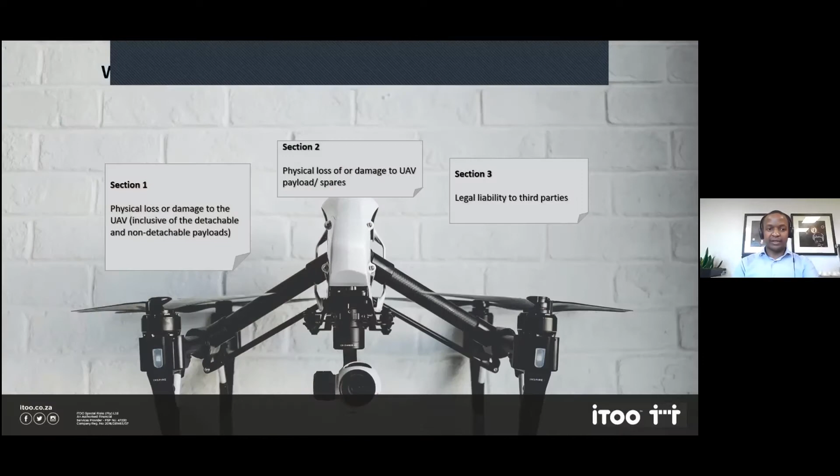Okay, let's see if these slides work. So a brief overview on what the iTOO UAV policy covers: there are 3 sections to that policy.

The first section mainly covers any physical loss or damage that happens to the UAV, or basically the drone, and anything that is a payload to it, whether detachable or non-detachable. So anything that is a payload—it could be cameras, anything you can attach to the drone and use in harmony with it. An example would be scanners, cameras. Human beings—no, you can't attach them to a drone.

Section 2 then covers spares for these UAVs. Spares are anything needed for the drone to operate, but is a spare part waiting on the side while the drone is using other parts. For example, your batteries, your rotors—section 2 covers that as a spare, which is ground cover against any loss, theft, or damage to it.

Then section 3 is legal liability to third parties. In this section, the liability we cover is for any damage that happens to property or physical bodily injury.

Goes also on to noise and privacy coverage. So that is just the brief of these three covers, or these three sections, which are the main sections to the policy. Then there's also extensions to the policy.

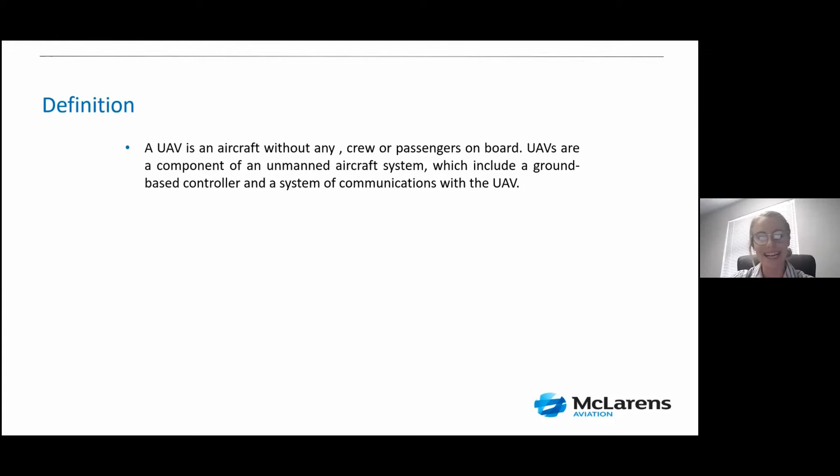Okay, let's go on to the next slide. All right, so over here we're just going to look at a quick definition of basically what a UAV is. So from this we'll obviously see a UAV is an aircraft without any crew or passengers on board the aircraft, as they would call it. And then it just says UAVs are a component of unmanned aircraft systems, which include a ground-based controller and a system of communications with the UAV.

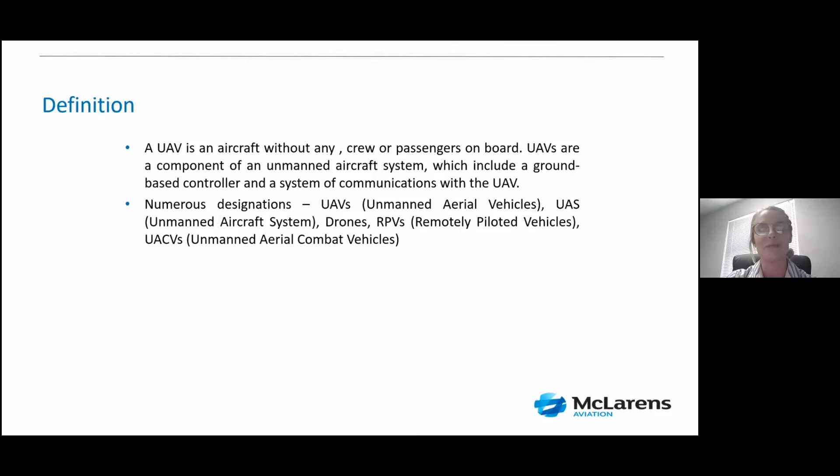There's numerous designations and names such as UAVs, which we said is unmanned aerial vehicles, UAS unmanned aircraft systems, we've got drones, we've got RPVs, remotely piloted vehicles. So there's many different words, and it's all the same. However, it just depends from person to person what they would prefer to call it, but the most widely used one would be a UAV. So for the sake of the presentation, we are just going to stick with UAV.

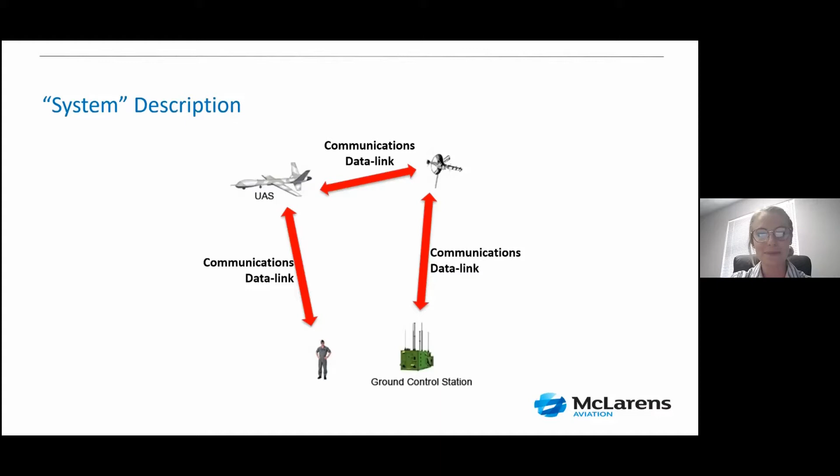Right, so now let's have a look at the system description. So over here we've just got a little bit of a diagram to show how everything interacts with each other. The ground control station, via links, communicates to satellites, to the UAV, and then back to the operator and vice versa. Right, so good, next one.

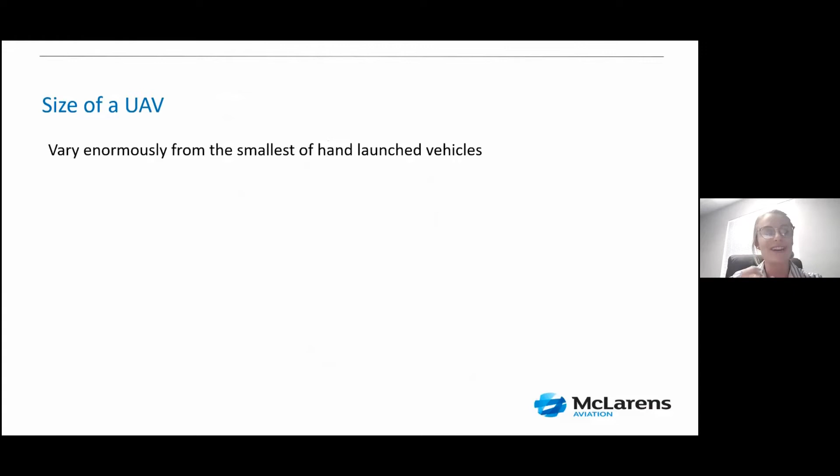Okay, all right, let's go on to the next slide. Okay, so let's have a look at just some manufacturers we've got here. We've got DJI, SenseFly, ALTI UAS, Parrot, Draganfly, 3D Robotics, Micro Multicopter, Aerialtronics, Precision Hawk, and many more companies that are less well known. However, they are a big list of commercial drones. DJI would be the biggest manufacturer that we've dealt with, as well as SenseFly.

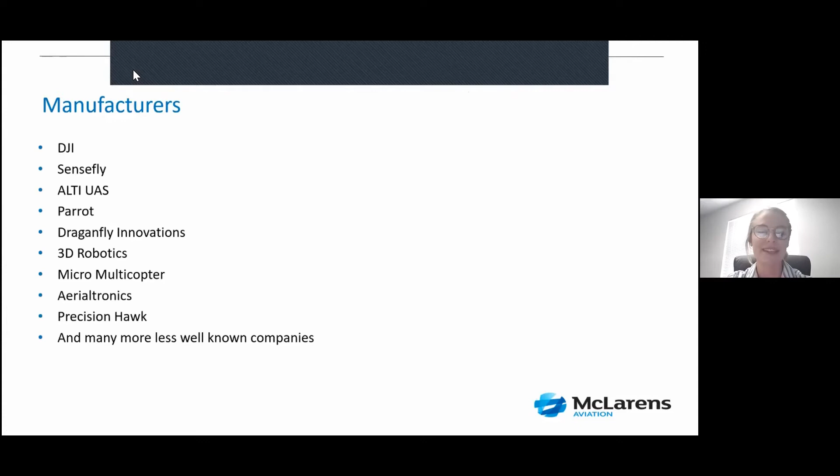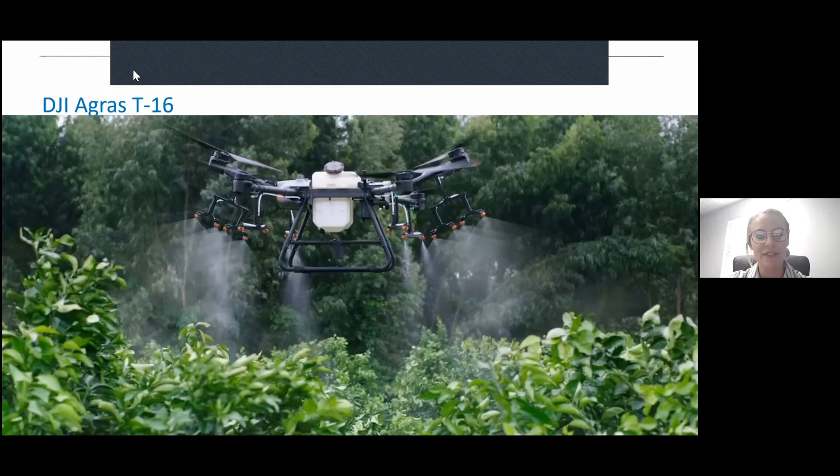And then we've got the DJI Agras T16, which is a crop spraying drone. Again, varies in size, looks, everything like that. So there's just a few different examples of the drones that you would get, as well as the ALTI Transition drone, which is the fixed wing VTOL drone. And again, we can see how big that drone is.

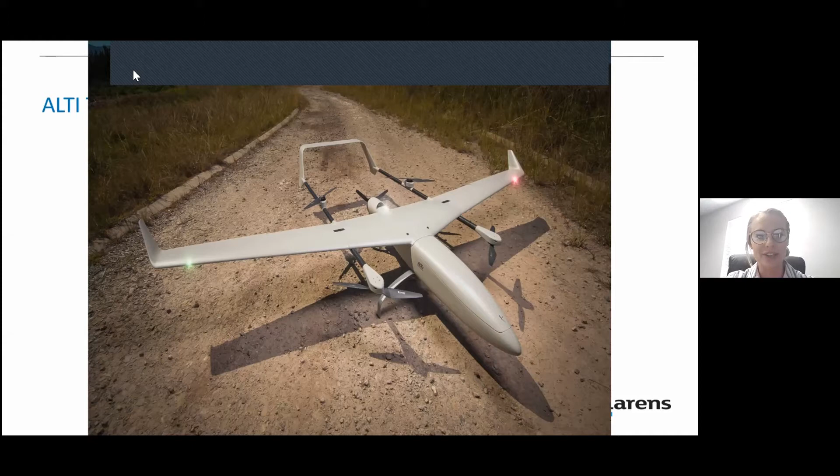Okay, so over here, we've just got a quick video of the different types of UAVs, which I will just ask Seku to play, and then we'll just have a look at that.

Drone types. The drone industry has really taken off over the past decade. From racing drones and hobbyist options to delivery drones and more commercial uses, many of us are finding reasons to love these mainstream convenience boosters. To learn more, let's dive into the video.

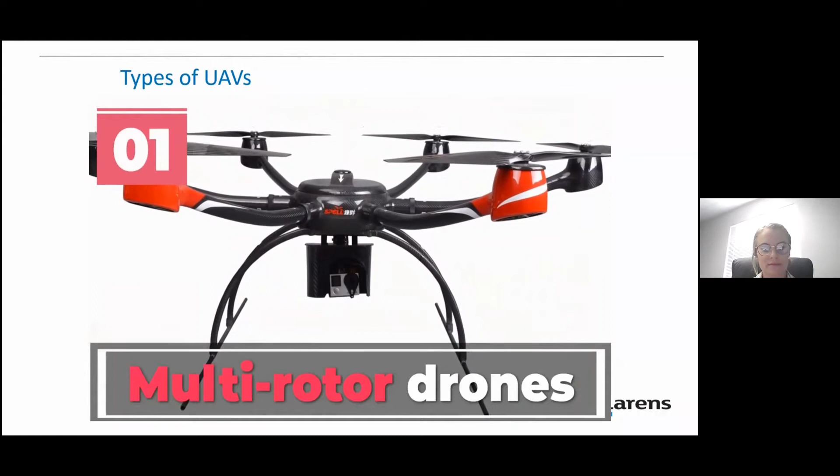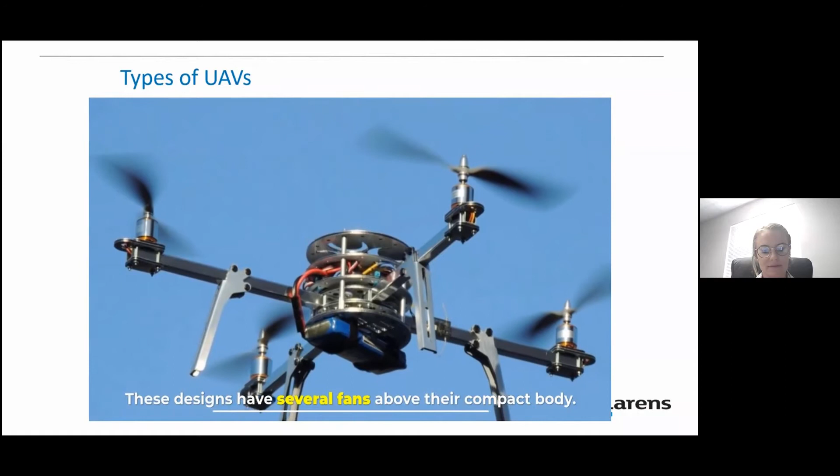Number 1. Multi-rotor drones. If you've seen small drones in your local park, they're likely multi-rotor models. These designs have several fans above their compact body. The multiple propellers create powerful lift and give the pilot precise control.

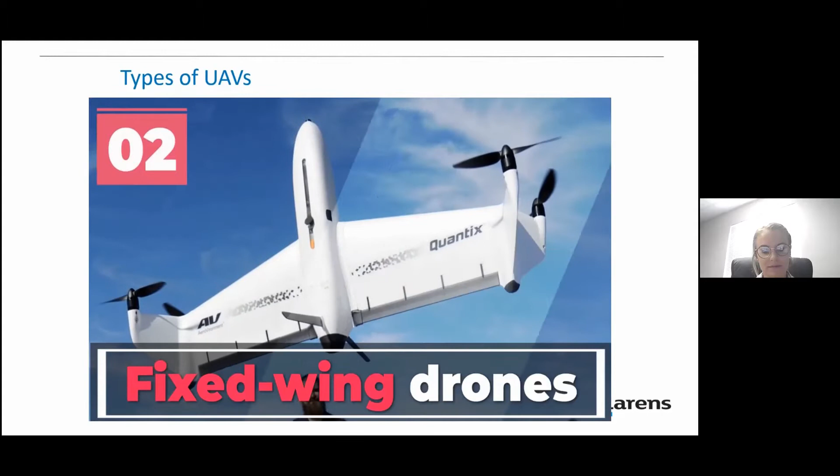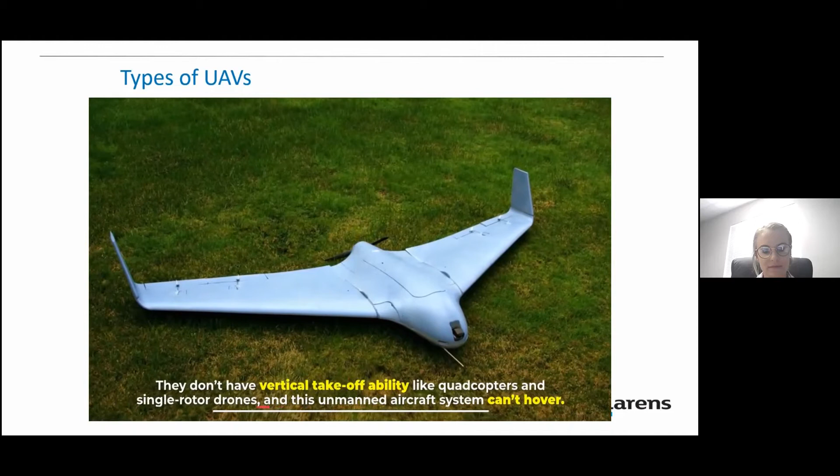Number 2. Fixed-wing drones. As their name suggests, fixed-wing drones look more like conventional planes, requiring a runway or a catapult to launch. They don't have vertical takeoff ability like quadcopters and single-rotor drones, and this unmanned aircraft system can't hover.

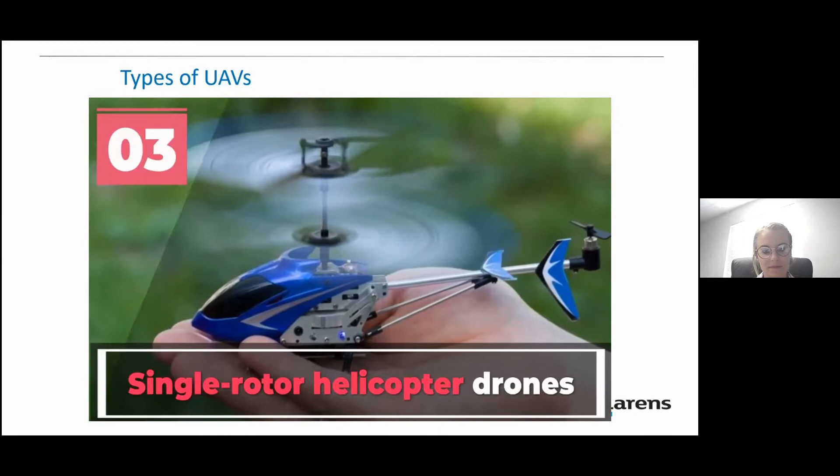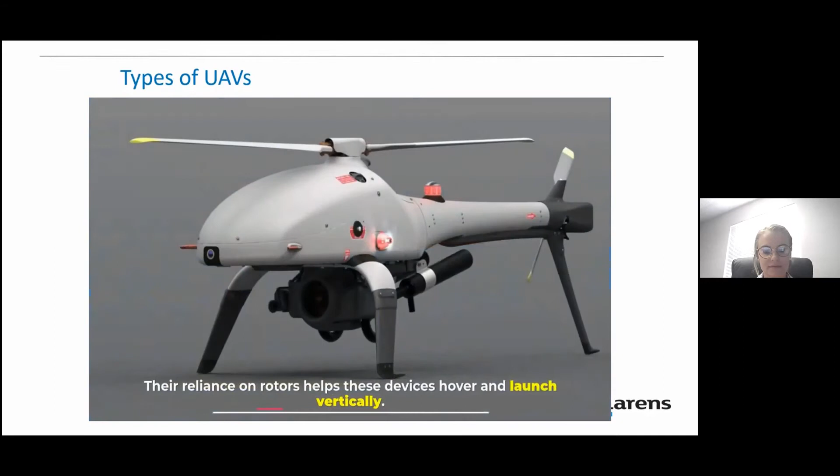Number 3. Single-rotor helicopter drones. These helicopter-style drones combine the best attributes of tiny multi-rotor devices and large fixed-wing units. Their reliance on rotors helps these devices hover and launch vertically. They tend to be larger than their tiny counterparts, suiting them to carry larger payloads. The lack of multiple motors makes them more efficient than multi-rotor models.

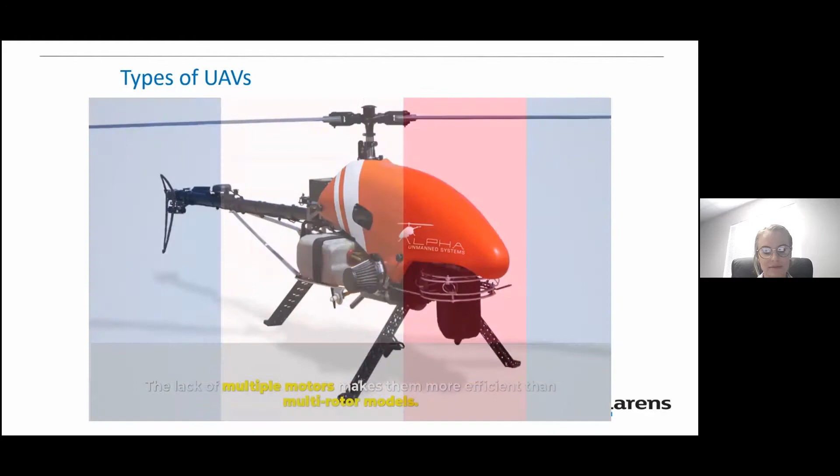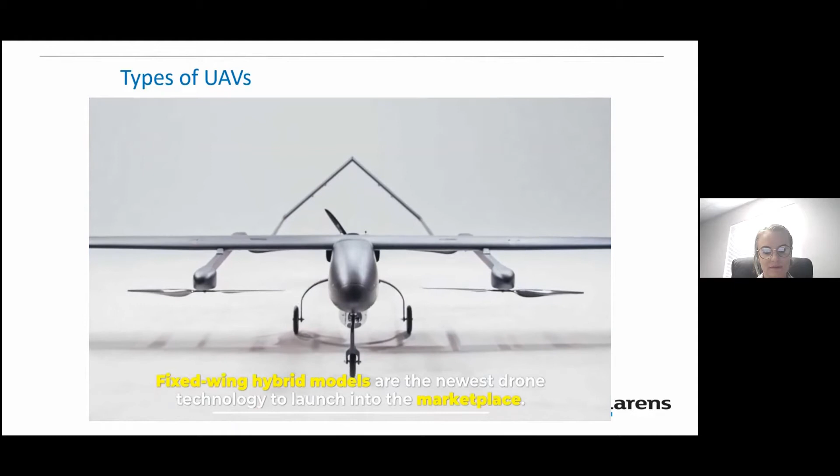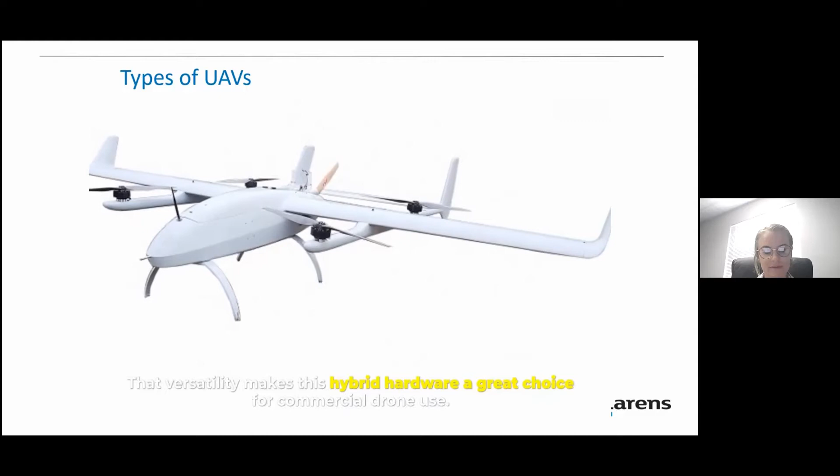Number 4. Fixed-wing hybrid VTOL drones. Fixed-wing hybrid models are the newest drone technology to launch into the marketplace. They combine the long range and flight time of fixed-wing drones with the vertical takeoff ability of a rotor-based device. That versatility makes this hybrid hardware a great choice for commercial drone use. Some companies are already using these models for delivery purposes.

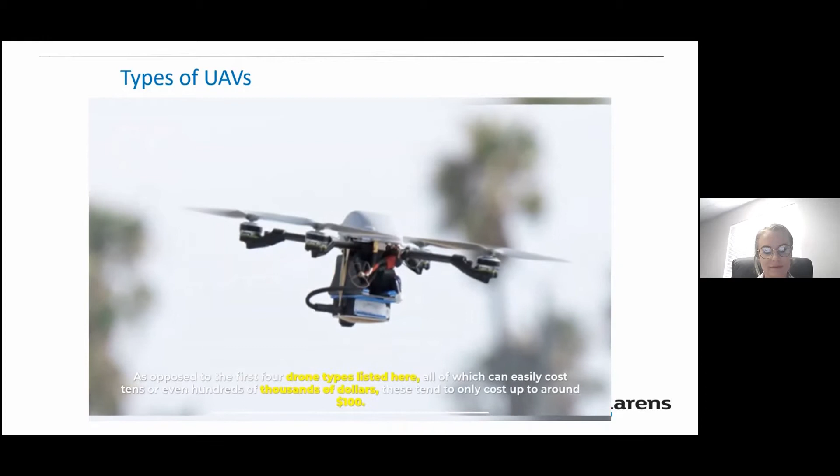Number 5. Small drones. As opposed to the first 4 drone types listed here, all of which can easily cost tens or even hundreds of thousands of dollars, these tend to only cost up to around $100. Small in this context typically means between 20 and 80 inches long.

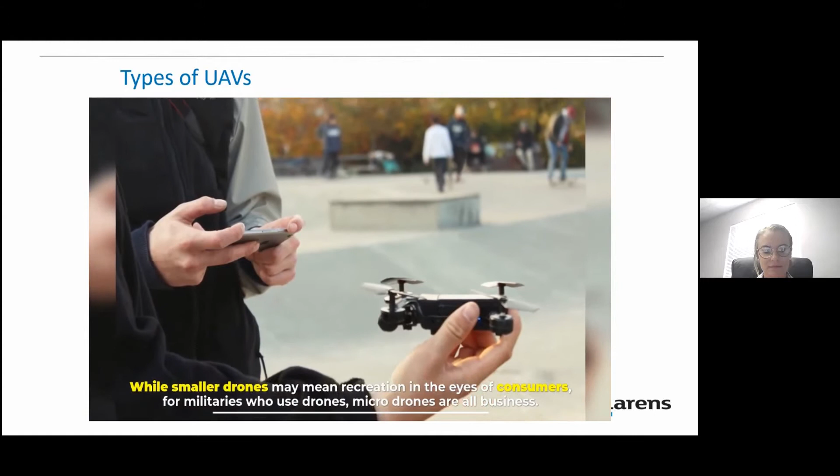Number 6. Micro drones. While smaller drones may mean recreation in the eyes of consumers, for militaries who use drones, micro drones are all business. The most well-known example of this type of drone in action today is the Black Hornet, manufactured for the British military.

Number 7. Tactical drones. These types of drones are often used for surveillance work. As with the Black Hornets, the Ravens are capable of being outfitted with special infrared cameras, helping them supply soldiers with an accurate picture of the area even in the nighttime.

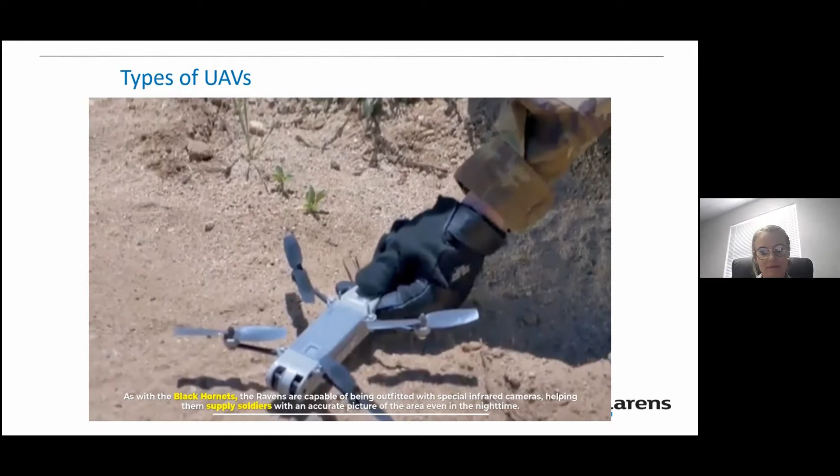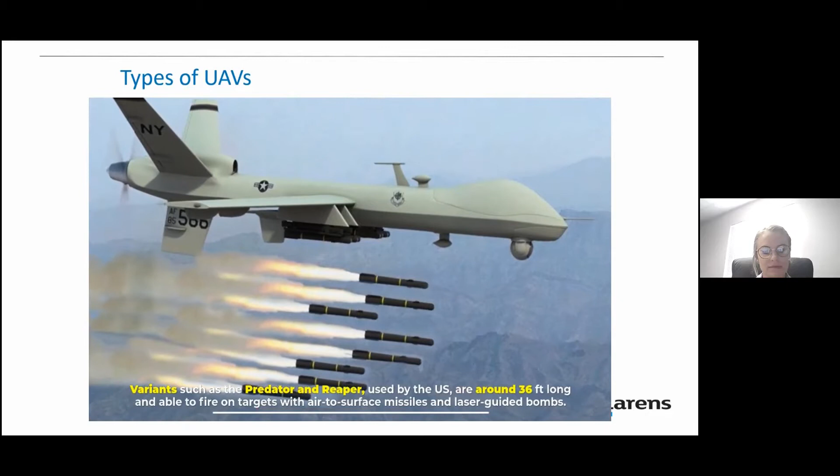Number 8. Large combat drones. Chances are when you think of drones in a military sense, these are the types you imagine. Variants such as the Predator and Reaper, used by the US, are around 36 feet long and able to fire on targets with air-to-surface missiles and laser-guided bombs.

Okay, so from that we can just see that there are various types of drones as well, and they are actually just getting more and more advanced technologically, which is a great thing for all of us. So there we go. So onto the UAV market.

So first of all, South Africa is the largest drone market in Africa. And we're just going to have a look at a few statistics just to give a little bit of context. So globally, the overall UAV market is estimated to be USD 27.4 billion in 2021, and it's projected to reach USD 58.4 billion by 2026 at a compound annual rate of 16.4%, which is enormous.

So then just to give a bit of background with that, the UAV market is classified into various segments, which are military, commercial, government and law enforcement, and consumer segments. The military segment is projected to grow from 12.760 million in 2021 to USD 19.641 million by 2026 at a CAGR, which is that compound annual growth rate, of 9%.

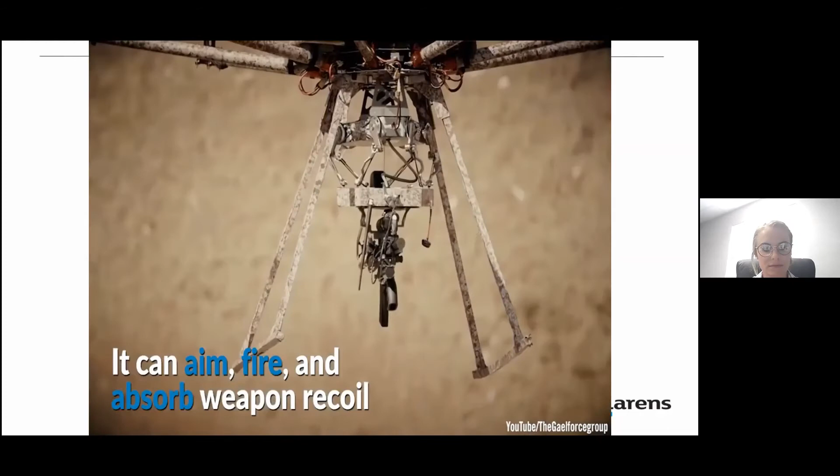Here we go. So yes, different types of applications, different drones will obviously determine the applications that we can use for them as well. And now we're just going to have a look at some payloads.

So payloads that can be added onto these drones, for example cameras, forward-looking infrared, radiation detectors, thermal imaging, electromagnetic probes, and then we've got some specific scientific testing devices.

Next one, okay, then we've got the LiDAR and we've got pesticide and fertilizer. So just to go back, laser imaging, detection and ranging - what that basically does is it uses sensors with light energy emitted from a laser, which will scan the ground and measure distances, which will then be used for modeling, creating 3D models, used for maps, etc. So that's quite a big one.

And then, of course, just the pesticide liquid fertilizer for crop spraying, which will be tanks that are then put onto those specific drones.

Okay, so to move on to the risk assessment. Just a quick one there. What we'll have a look at with determining the risks involved with drones is just a brief summary of what to have a look at.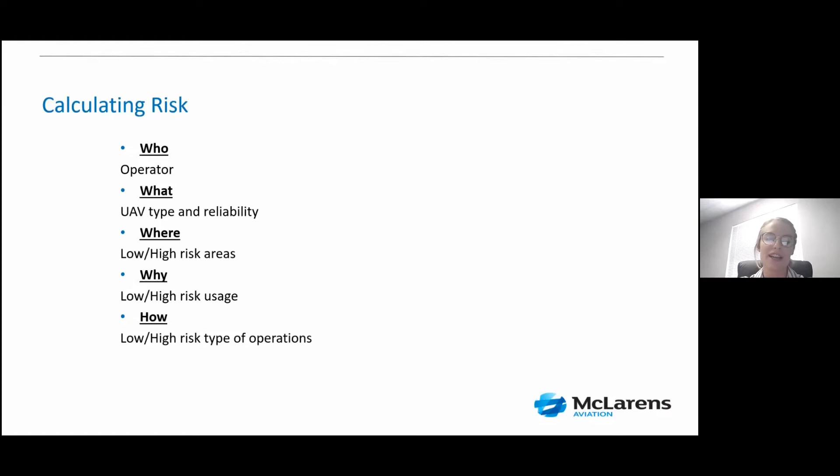And then we'll look at why the drone is being used, for what it's being used, the application, and how it's being used as well, so the risk types of operations. We have a look at all of that. So that's just a few things on how the risk is calculated.

So then just to go on to Part 101 very briefly, with regards to UAVs. The SACAA is one of the strictest countries when it comes to UAV operations, which is a very good thing. So let's quickly have a look at what they basically say.

Just a quick one, with regards to commercial operations, the CAA states in Part 101 that no remotely piloted aircraft shall be operated within the Republic of South Africa unless such RPA has been issued with a certificate of registration by the director. That's very important for commercial drones.

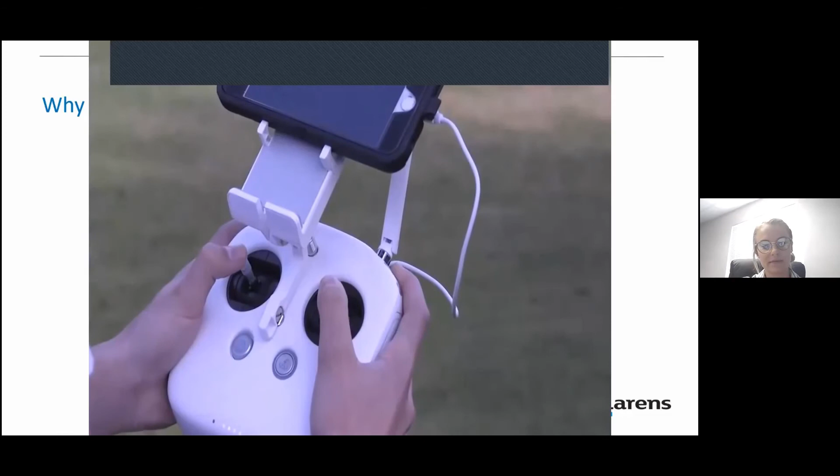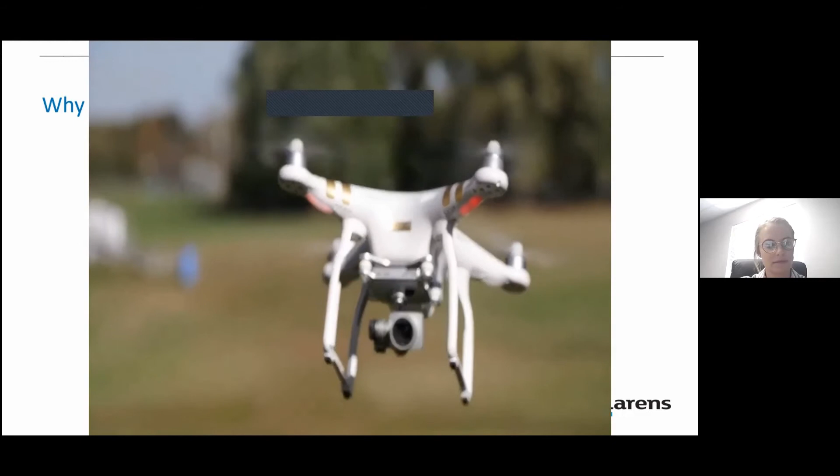With hundreds of thousands of personal UAVs currently in public hands, the question of will a serious drone strike on an aircraft occur is no longer a matter of if, but when, in the minds of many experts. While tests on bird strikes have been conducted for decades, what kind of damage a drone would cause was still virtually unknown until now.

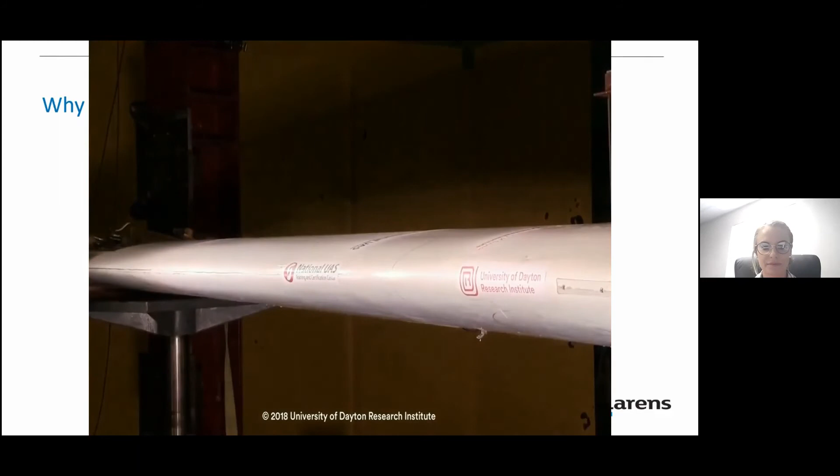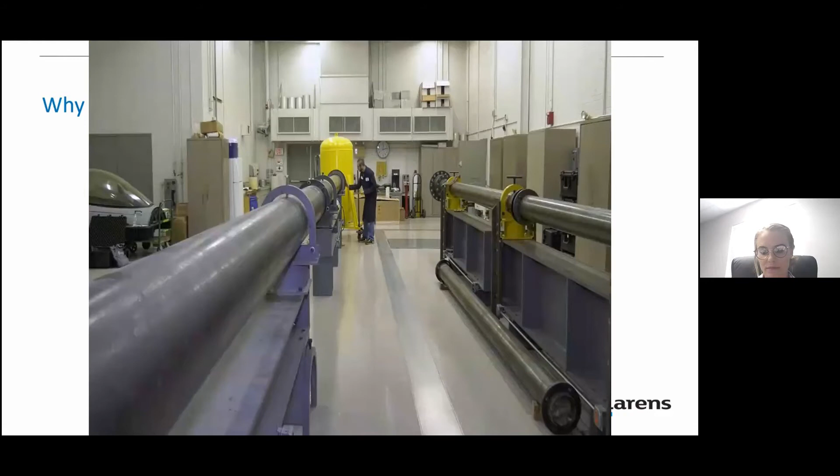Researchers at the University of Dayton Research Institute are no strangers to airframe impact testing, and they recently partnered with Sinclair College National UAS Training and Certification Center to determine what could happen to a general aviation aircraft if it hit a recreational drone in midair.

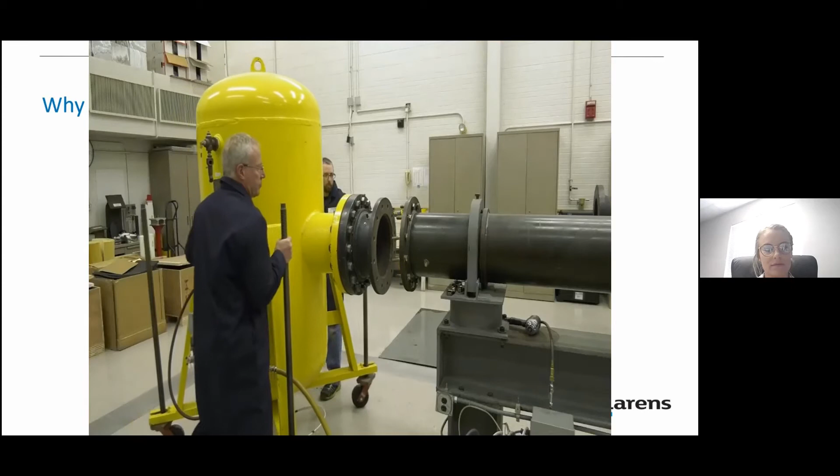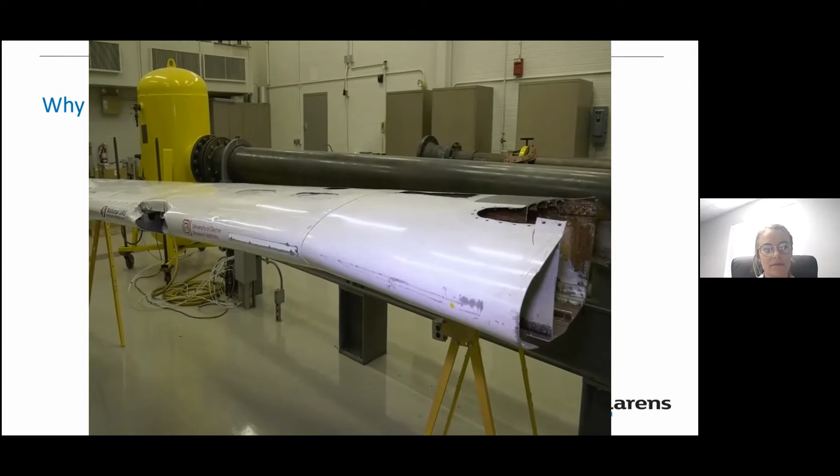We wanted to demonstrate what the hazards are, or the potential risks are with a drone strike on an aircraft. There's very little data out there to help people understand what happens. There have been other types of this drone testing, but with individual components - they've tested batteries, motors, cameras, and launched them into panels, but not actual aircraft structures. This test was to see what would happen if an entire drone struck the leading edge of an airplane wing.

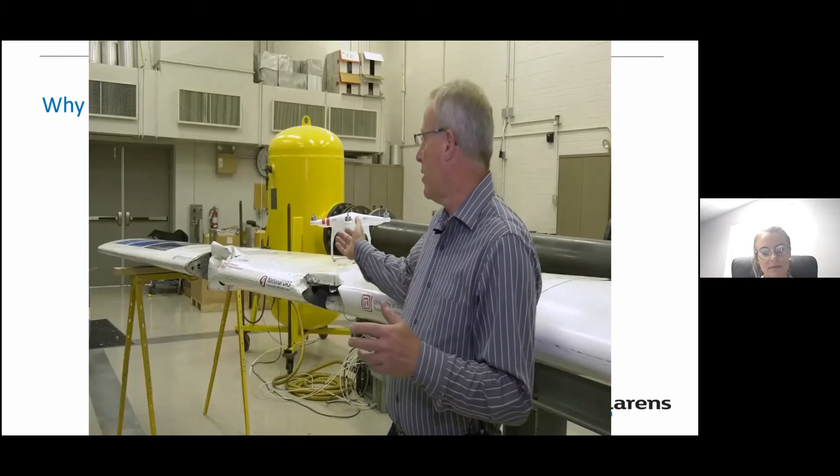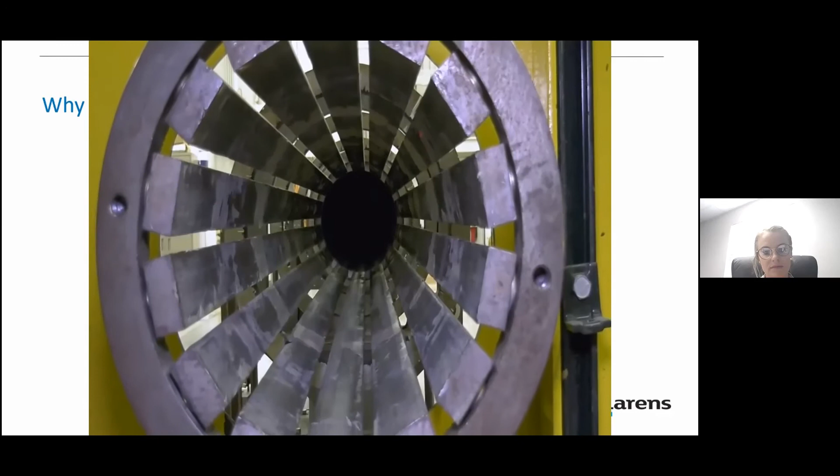The drone used for this type of testing is a DJI Phantom 2, a very popular drone for hobbyists. It was loaded into the university's Impact Physics Lab's compressed air cannon, which fired it at the wing of a Mooney M20 at a speed of 238 miles per hour, a speed that approximates the closing speed between the two aircraft.

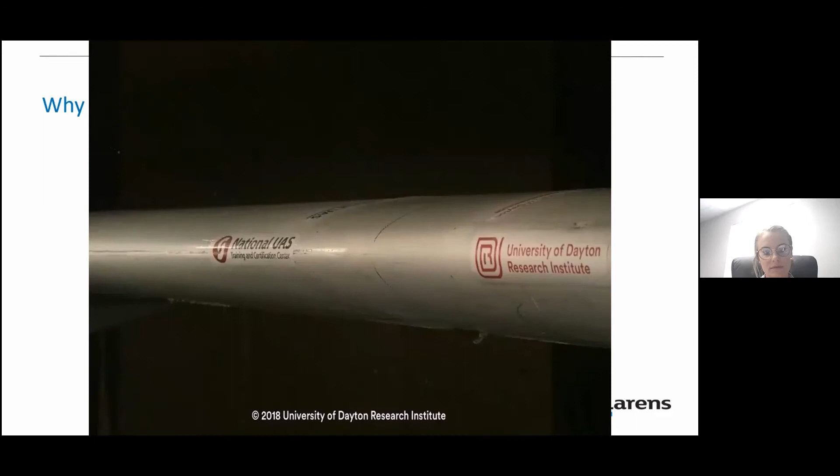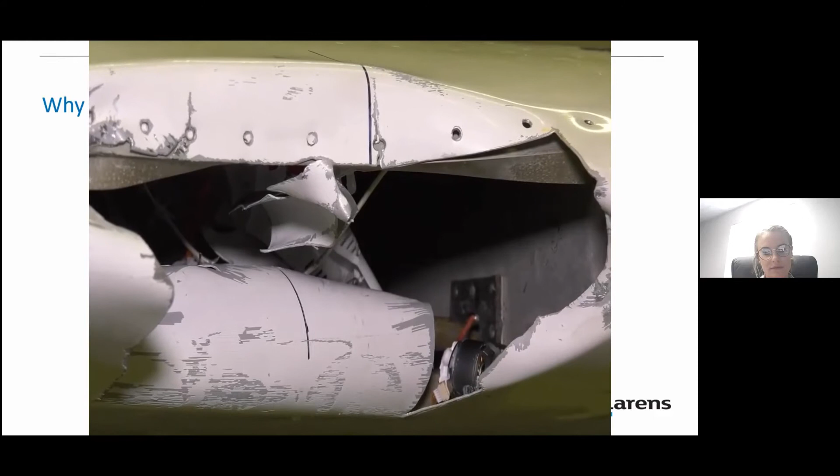The drone did not shatter apart. It completely penetrated and was buried inside the wing. You can see a hole in the leading edge here. The main spar is dented. There are several fasteners pulled from the spar and the wing skin. Some stringers are bent, and there's also some tubing inside that was bent. So there was a substantial amount of damage to the wing.

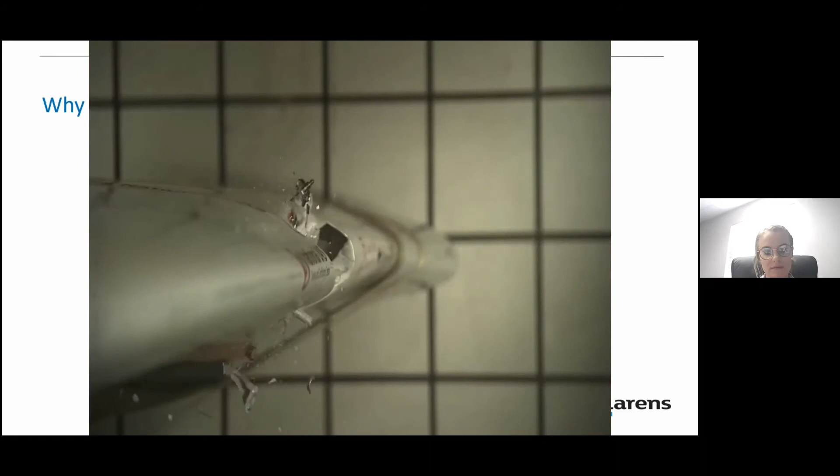While Poorman believes the aircraft would have survived the impact, he also believes that for a faster aircraft the results could have been worse. If this was a business jet traveling twice as fast as what we tested, there would have been substantially more damage to the spar, or it could have penetrated a fuel cell, because the energy goes up with the square of the velocity.

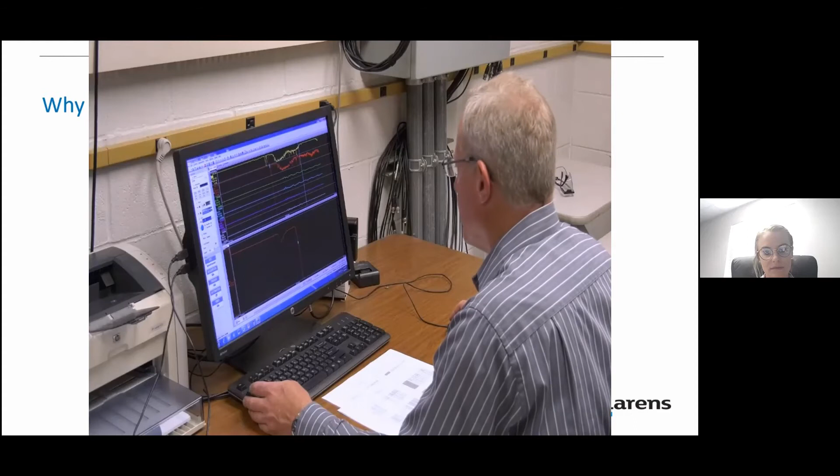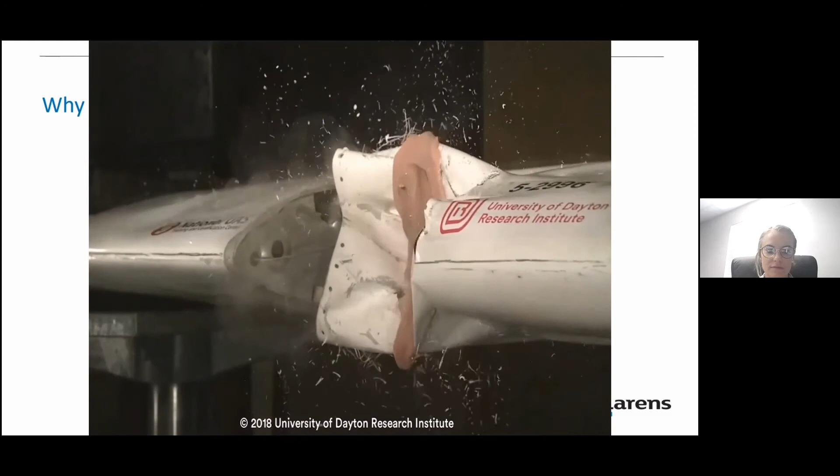Poorman has performed simulated bird strike testing for nearly 30 years, and he tested to see what damage a similar sized bird might cause under the same conditions. To compare the impact of the drone strike to an actual bird strike, we did a simulated bird using a gelatin projectile of the same weight and approximately the same speed. The bird actually just crushed the leading edge and didn't do any internal damage.

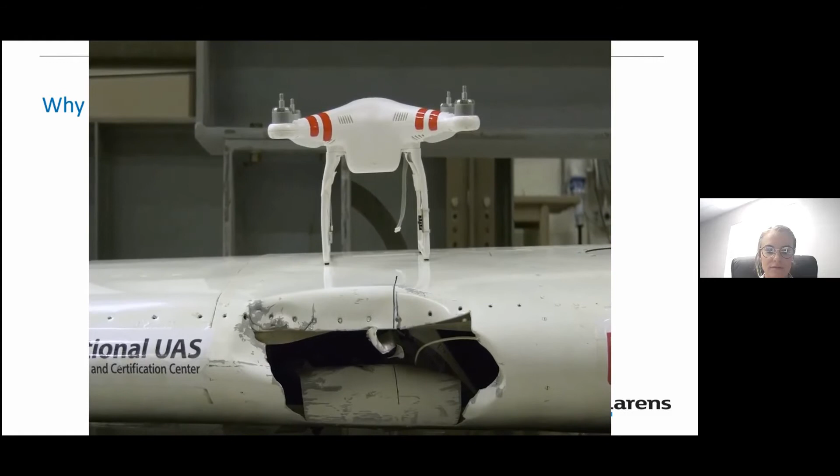As the drone population increases, the likelihood of these kinds of events will also increase. In my opinion, what we need to do is look more at how drones are constructed, and perhaps make them more frangible so they act more like birds do when they impact and break apart. I think that's key for minimizing the risks of these kinds of incidents.

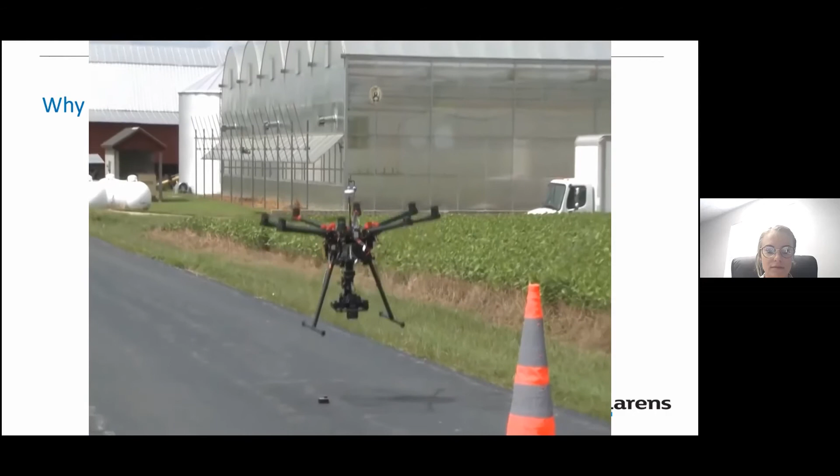In the meantime, Poormon cautions hobbyists to understand the potential for hazardous impacts and to be more aware of the risks when they take to the sky. For AIN TV, I'm Curt Epstein.

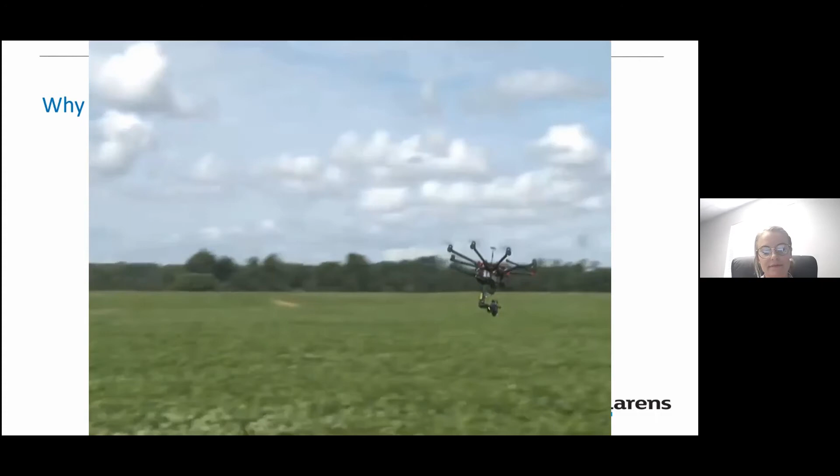Okay, so on to another question. From that video we can see obviously why it would be such a major thing if a drone were to collide with an aircraft. It would cause a substantial amount of damage to the aircraft and to the drone as well.

Okay, competition time again, just a quick one. So at what speed was the impact test on the aircraft conducted? Any questions or answers? Let's take it from there.

Okay. Well, okay. Let's go on to the next one.

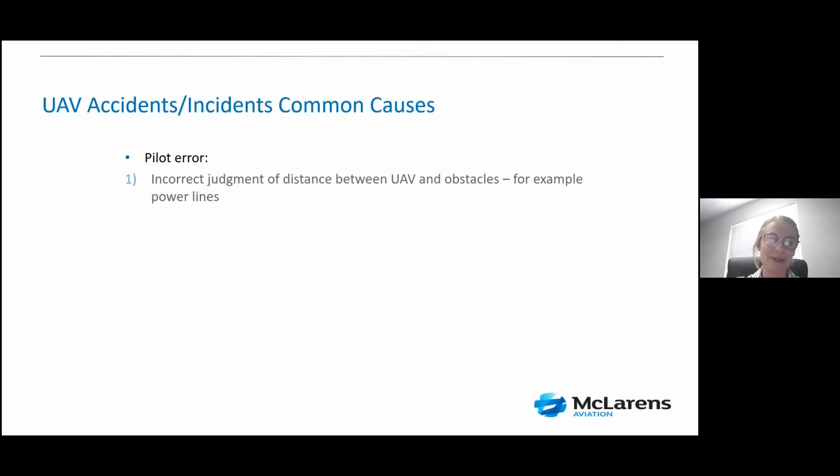Okay, so now we're just going to move on quickly to UAV accidents, incidents, and common causes. This is from a loss adjusting point of view, what we have also seen as common causes.

Pilot error is a big one. That would be incorrect judgment of distances between UAVs and obstacles, for example, not judging correctly the distance between the drone and power lines or buildings. Also selecting the incorrect flight mode for a specific phase of flight, not following the correct procedures in an emergency as stated in the user manuals and training, and forgetting to complete pre-flight checks.

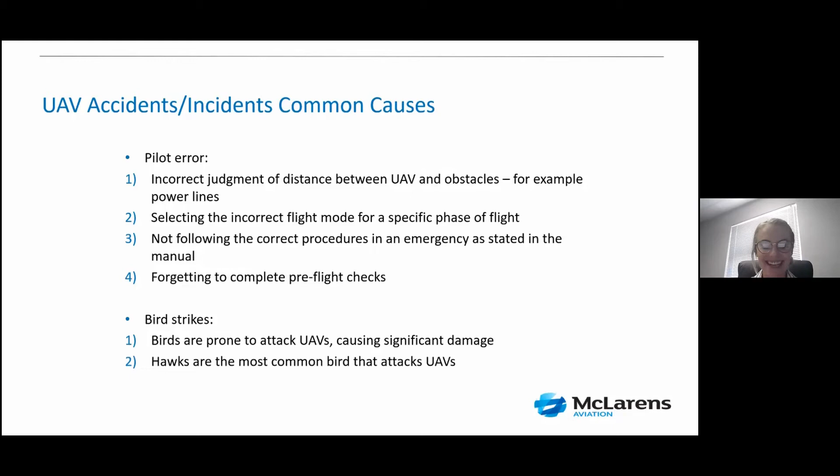Also a common one would be bird strikes, which we're seeing more of, specifically with hawks - they really like to attack the drones in the sky. We've also got loss of signal or connectivity, sudden losses of battery power, pitch roll instabilities during landings, hard landings, failed takeoffs, and equipment malfunction.

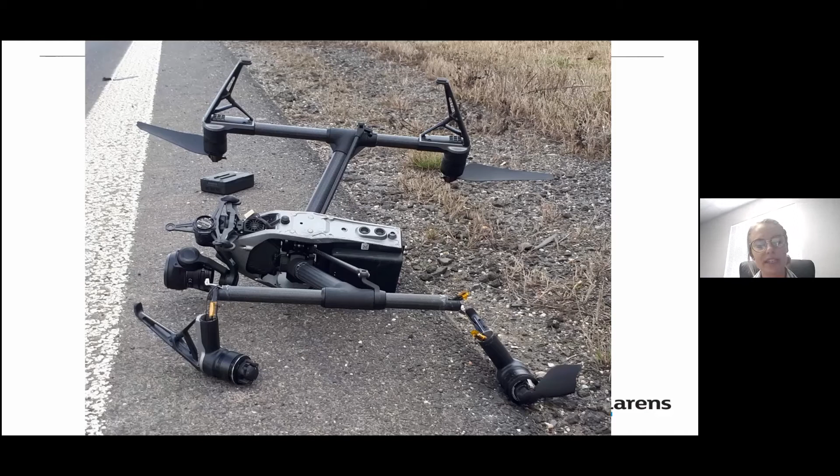So then the next one is just a simple example of what damage would look like if the drone was to have a hard landing - not that badly damaged, however there are some components that are still damaged.

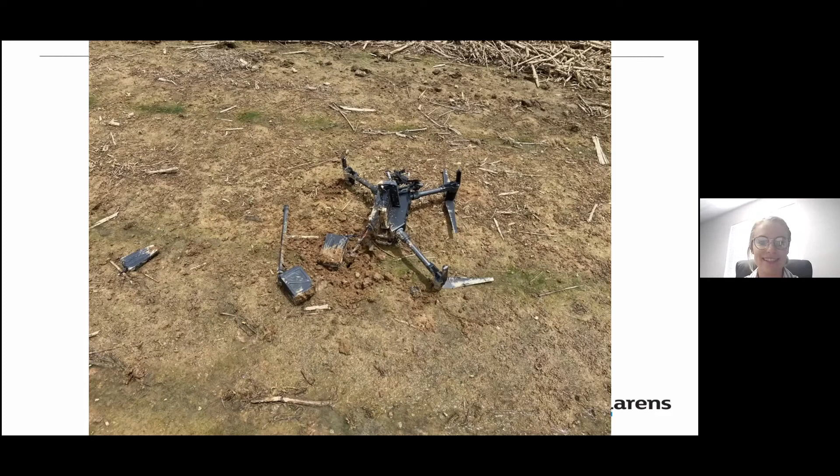This drone crashed quite significantly, so you can see there was major overall damage to this drone.

And then competition time again. The three main sectors of the iTOO commercial drone policies cover what?

Okay, thanks Margaret. Okay. All right, Seku. Thank you, Laura. Feel free to jump in whenever you can. Unfortunately I'm sharing my screen, so the only thing I can see is the presentation, I can't see if there's any hands up or any questions.

We'll address the questions towards the end. We just want to go through a few case scenarios, and Laura and Dita, feel free to jump in and say what you have seen when assessing certain types of scenarios or claims. The first one we'll consider is a case scenario which entailed a bird strike.

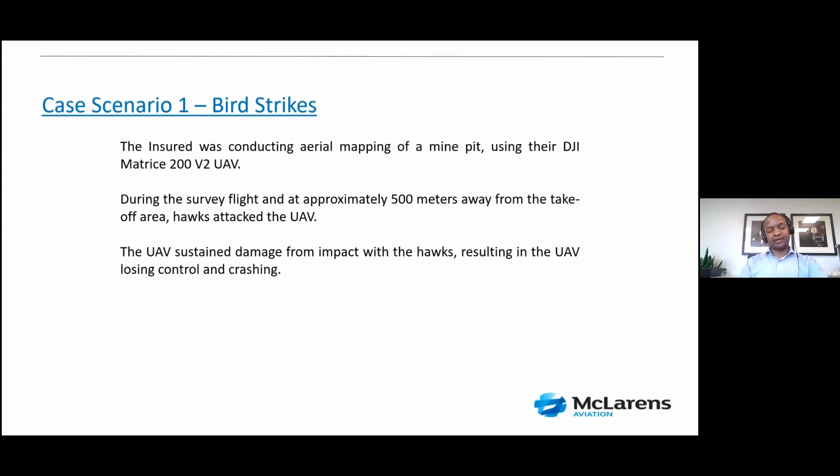Here we had an insured conducting aerial mapping at a mine, approximately 500 meters away, when a hawk attacked the drone. Whilst we humans are embracing the change of having drones, it seems like the hawks are having a hard time. The question would be, what are the risk mitigations to that? Is there anything an operator can do, or anything as an ROC that they can do?

What we've seen on our side, from a few cases where there was a bird strike, is that these things happen quickly, and most of the time they're just unavoidable because it happens so fast. It's not as if when you see a bird you can try to run away with the drone - no, it happens in a split second.

Therefore it's important to do pre-flight checks, things you check before you take off. The surrounding area - is it an open field or full of trees? Because most of the time these birds are actually territorial, so before taking your flight you just check your surroundings. If you can see there are already a lot of birds, it might not be advisable to fly. However, this is left to the prerogative of the operator doing that mission.

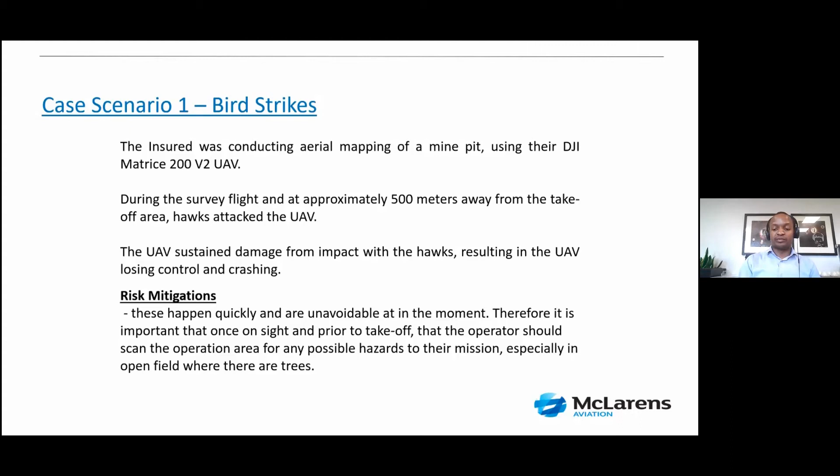But now the question is, how would the iTOO policy respond to a bird strike?

So we would cover an incident under section 1 of the policy for physical damage when a bird strike happens. But now the question is, how do we know that the bird strike actually happened, because we were not there? So how do you validate and verify the claim? Lara pointed out, for example, when doing the physical assessment of the drone, you can find claw marks, feathers inside.

So it's not like a case where you can have a witness statement from the bird saying, I was flying northwest and I hit, or the drone jumped in front of me. No. So we have these flight data that can assist us to tell us, yes, there was in fact something that happened whilst it's in the air.

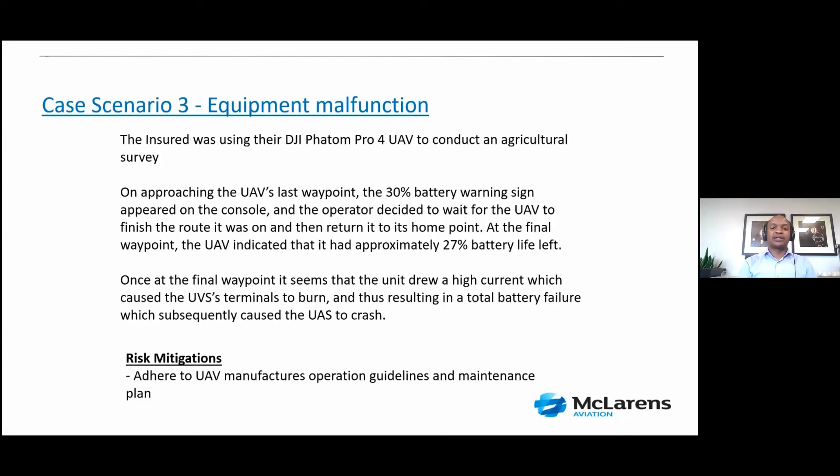And it's just good housekeeping. Make sure your batteries have what is called a lifetime or span. You can only use it for so long. If you follow the manufacturer's guidelines, that will help make sure that the batteries you're using are in good condition.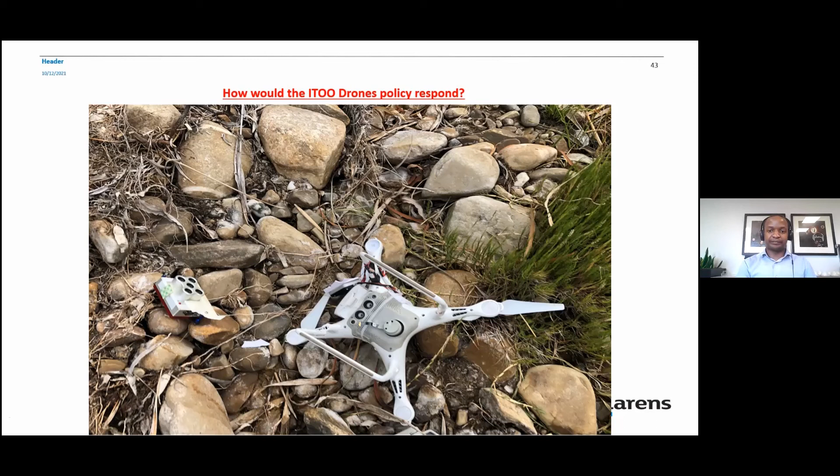Then the last scenario, I'm just conscious of time, would be signal loss. In this case, it was a DJI Inspire 2. About 1 minute into the flight, there was strong wireless interference and then it just dropped dead.

And somehow this signal from that tower was so strong that it cut off the communication from the controller to the drone. After that, he could not control it, and that's why it came crashing down. This tower, interestingly enough, was a whole kilometer away, but it was able to do that much damage.

Again, how would we know what happened? We have flight logs, there's programs that can assist us, and it gives us that information that we need. In such cases, there's very few risk mitigations that you can take, especially because you wouldn't know, we can't see these signals or frequencies.